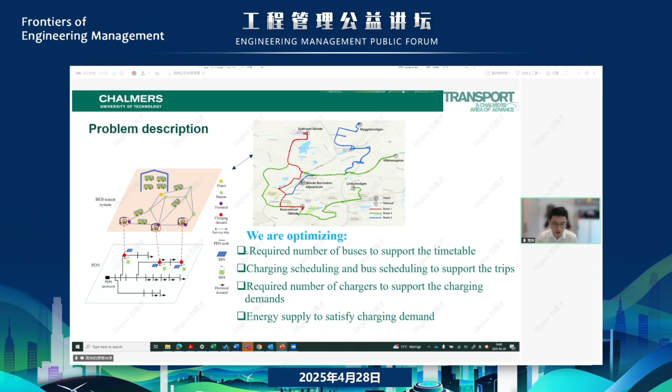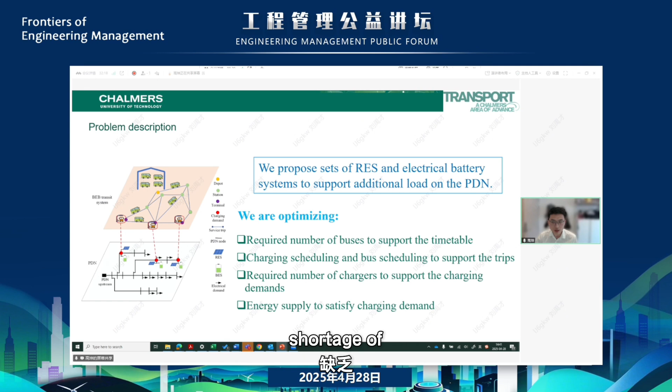So, as I mentioned before, there is a potential issue in some vulnerable nodes of the power distribution network. So we propose to integrate renewable energy, photovoltaic with battery storage, to complement potential shortage of energy supply from the power distribution network. So this is our optimization model framework.

So in the objective function, we consider the infrastructure cost, including the cost to buy the electric bus, the cost of installing chargers, and also the cost of installing the renewable energy with battery storage. For the operating cost, we consider the cost of buying electricity to satisfy the charging demand. And to solve the problem, we use Benders decomposition methods.

So basically, we divide the problem into the master problem and the sub problem. And the master problem is the operational optimization about when and where, how the bus should be charged. And the sub problem is the infrastructure optimization in terms of where and how much infrastructure you should put in each charging point.

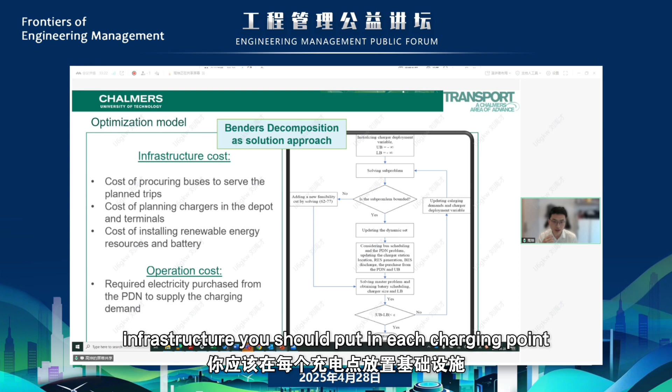So we take a case study in one small city, Skövde, in Sweden, and we get the three bus routes in the city and the timetable. And for the power distribution network, it is really hard to get the real power distribution network because it's a little bit confidential. It is related to the security issue. So we use an IEEE standard power distribution network for the research purpose, as you can see here.

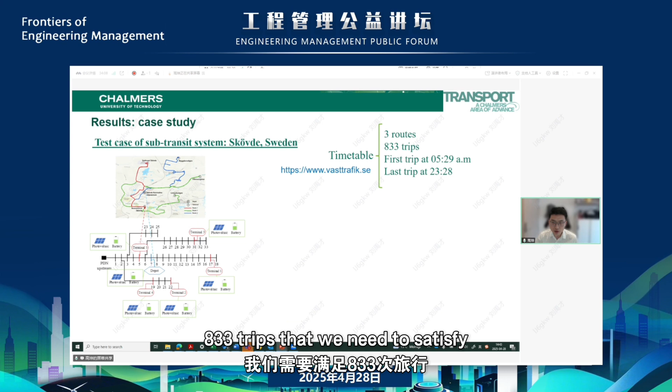So for the three routes, we have 833 trips that we need to satisfy. And because we consider the renewable energy photovoltaic as a potential complementary energy supply source, we estimate the electricity that can be generated by PV based on the solar radiation data from Sweden. And when we optimize the operation to reduce the operation cost in terms of the electricity cost, we also consider the time of use price of electricity as shown by the red curve here.

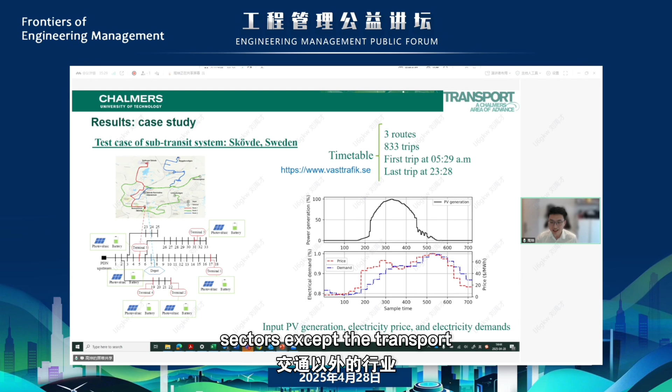And we also consider the electricity demand from other sectors, because the electricity demand on the power distribution network is not only from the transport, but also from the industrial and residential sectors, etc. So we take the historical data from Sweden for this city, as shown by the blue curve here. This is the electricity demand on the power distribution network from other sectors except the transport. So we also consider this.

So after optimization, the first output will be the charging scheduling for each bus. So for example, here the left top figure shows for two buses how the bus is discharged and charged. For example, as shown by the red curve, the bus runs 2 trips and then is charged, so the SOC increases.

And at the same time, we get the results about which bus should run which trip for which route, as shown by the right figure. For example, bus 2 was running the trip in route 2, but after this trip, bus 2 runs the trip for route 3. So that is more about operation optimization results.

So the left bottom figure shows the SOC and energy when the bus finishes the trips in 1 day and gets back to the depot. The green bar shows the SOC when the bus arrived at the depot after all the trips of that day. And the red bar shows the charged energy received at the depot for each bus.

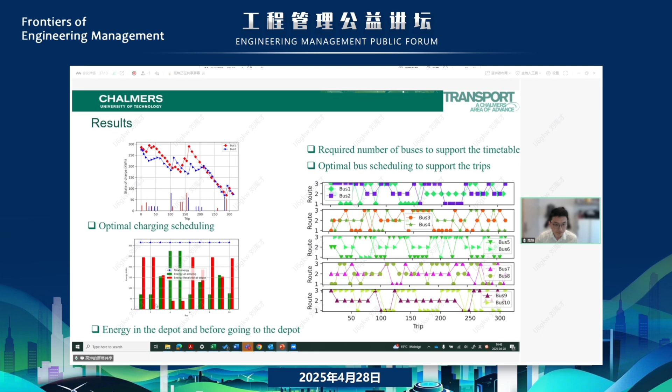So these 2 figures show how the energy supply satisfies the charging demand for the electric bus. The left figure shows the charging demand from the electric bus in the 24 hours of the day, and the below figure shows the energy supply from the battery storage. So the battery storage can receive the energy from the renewable energy. At the same time, it can receive the energy from the power grid. So how does it work?

As you can see, the battery is charged during the night, because the time of use electricity price is very low during the night in Sweden. So during the night, the battery storage is charged, and then it's used to charge the bus during the daytime. So we make the best of the time of use electricity price, so we can reduce the operation cost for the electric bus.

And the right figure shows the battery storage charging and discharging profile. As you can see from the green bar, the battery storage is charged by the renewable energy during the daytime, because we have the solar radiation during the daytime. But at the same time, the battery storage was discharging to charge the bus at different times of the day.

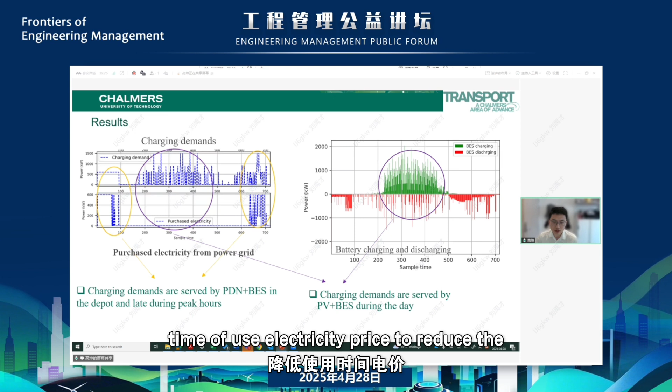So the energy supply to the electric bus system is from the renewable energy and the battery storage, and the energy from the battery storage could come from renewable energy if the solar radiation is very high, so you can store some energy from renewable energy. At the same time, the battery storage will make the best of the difference in the time of use electricity price to reduce the operation cost for the electric bus.

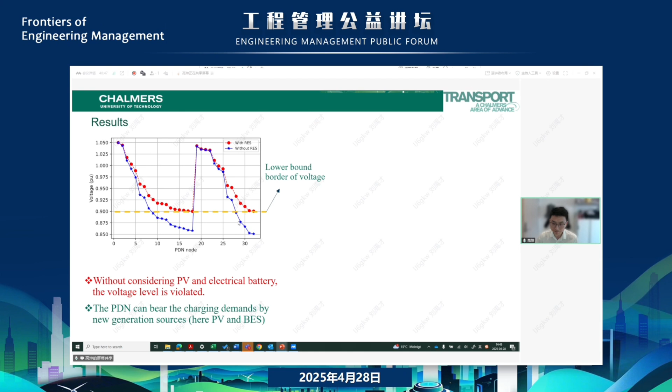So without renewable energy, with high charging demand in a short time, we will violate the voltage constraints of the power distribution network. However, in the scenario with renewable energy, because renewable energy could be a complementary energy supply to the electric bus system, we can satisfy the charging demand, but at the same time ensure it will not violate the voltage constraints of the power distribution network.

The right figure shows the final optimization results in terms of how many chargers and how much renewable energy, photovoltaic, and battery storage we should install in the candidate charging point.

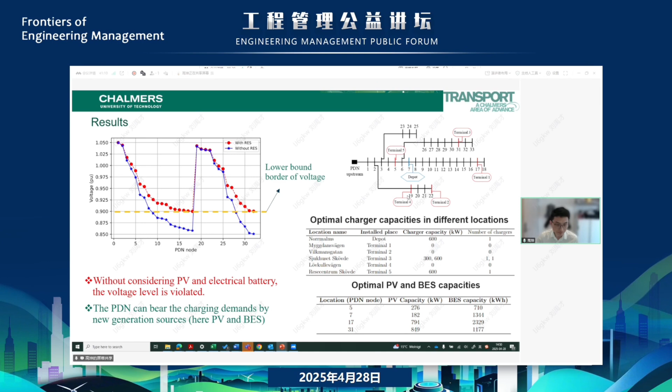So to summarize, this research tries to optimize the charging infrastructure and the charging scheduling for electric buses. And we integrate renewable energy with battery storage as a complementary energy supply to the electric bus to reduce the operation cost, and at the same time to avoid potential voltage violations in power distribution because of the high charging demand in short time periods.

The methodology and the research contents can also be extended to other transport modes like freight transport, because the violation issues of charging demand to the power distribution network are mainly because of very high charging demand in a short period. For freight transport, because of the high battery capacity of the electric truck, you really need to provide very high charging capacity, and then it may result in issues for the power distribution network. So this work can also extend to freight transport.

So this is connected research. It is more like a continuation of the research I just introduced. This research goes a little bit further, sharing the charging station of the public transit with micro-mobility. So in this research, we are trying to optimize the shared bus charging infrastructure and the scheduling, considering the renewable energy, photovoltaic, and also considering the sharing scheme to share the public transit charging station with micro-mobility.

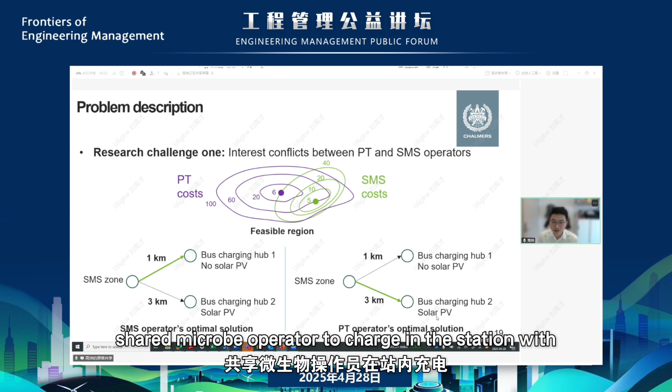So the public transit operator can share the electricity from PV to the shared micromobility operator when the bus system doesn't need the electricity from the PV. So the shared scooter company would like to charge nearby, but the public transit operator would like the shared micromobility operator to charge in the station with solar PV. So there is a potential conflict there.

So to solve this research challenge, we propose an optimization framework and a bi-level mixed integer linear model, formulated as a leader and follower problem. The leader problem is that the public transit operator optimizes the charging infrastructure, the photovoltaic infrastructure, and the charging scheduling for the electric bus operation. At the same time, it provides the available charging windows to the shared scooter operator to charge the battery there.

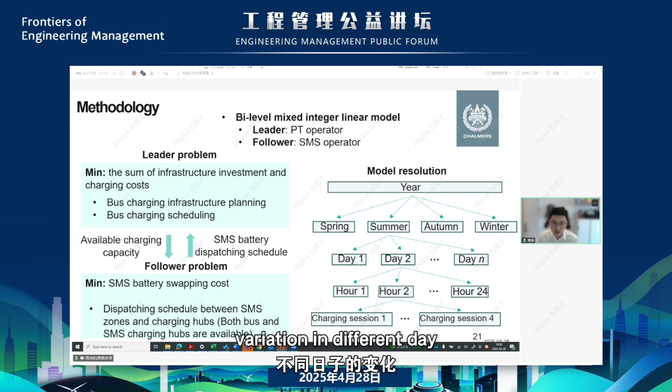But the optimization from the shared micromobility operator perspective will follow the decision from the public transit operator. And for the optimization, we consider different seasons, because it will affect the charging demand from the scooter sharing system, and we also consider the charging demand variation in different days and different hours of a day. So this is a summary of the problem framework I just mentioned.

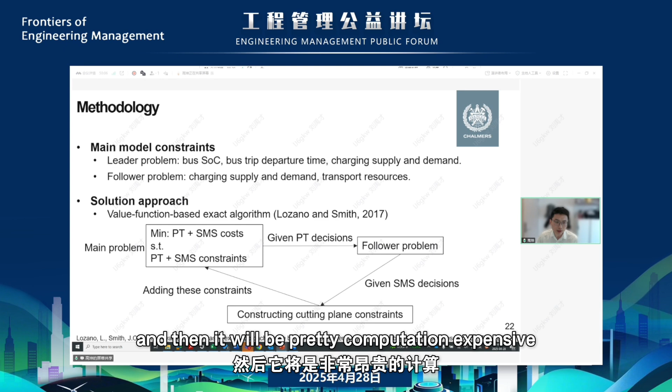And we use a solution approach called value function-based exact algorithm. Because we're trying to solve the problem for the case study in the whole Gothenburg, it will be pretty computation intensive. So to improve the computation efficiency, we propose a cutting method to reduce the optimal solution searching space. We call it super valid inequality, but because of time, I will not go into details. The aim of this strategy is to cut down the optimal solution searching space so we can reach faster convergence to get the solution.

So we do the case study for whole Gothenburg with 70 bus routes and 61 bus terminals. And we have the data about scooter sharing in Gothenburg so that we can get the charging demand in different hours of the day, different days of the week and different seasons. We also consider the time of use electricity price when we do the optimization. And we divide the Gothenburg area into e-scooter zones. The zone is more about gathering the charging demand from e-scooter.

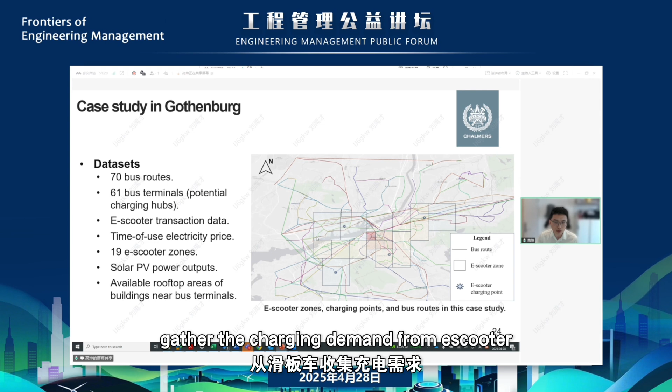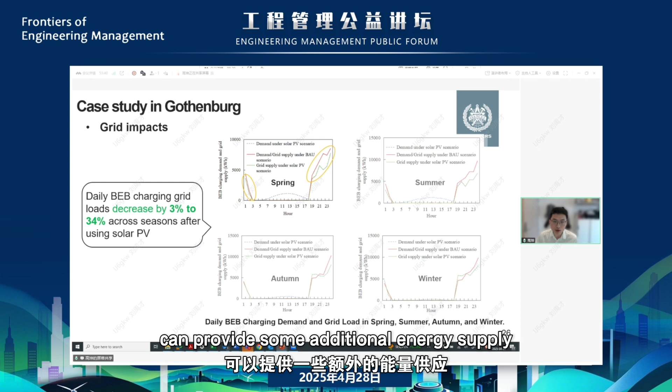And this is trying to show the benefit from installing PV. I will take the first figure as an example. The red line shows the demand that we request from the power grid to satisfy the demand from both public transit and the shared scooter. And the green line shows the electricity supply request from the power grid when we have the PV. As you can see, installing PV will reduce the electricity demand request from power distribution, and then it can reduce the burden on the power distribution network, which is expected because the PV can provide some additional energy supply.

And we're also trying to analyze the benefit in terms of emission, considering the greenhouse gas emission factors from electricity generation in Europe. The results show that if we install PV, because some electricity will come from solar radiation, it can reduce the emission by 3%. And if we enable sharing and the solar PV at the same time, the emission impact will be very similar, also around 3%.

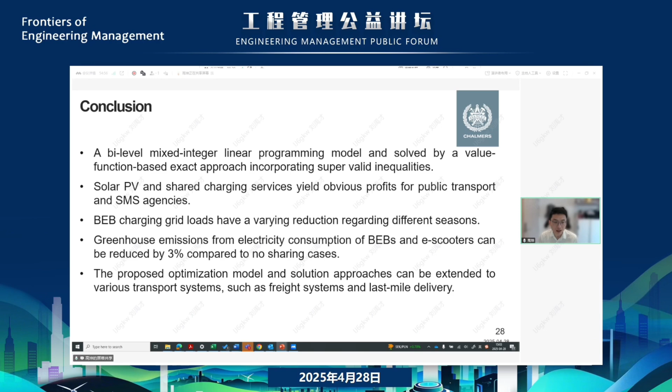So to summarize, we are trying to implement PV integration to provide additional energy for the electric public transit and electric shared scooters. And we implement the sharing scheme of the public transit charging points to the scooter sharing to reduce the operation cost. And we do the optimization and the evaluation in terms of economic and emission benefits of the proposed optimization strategies.